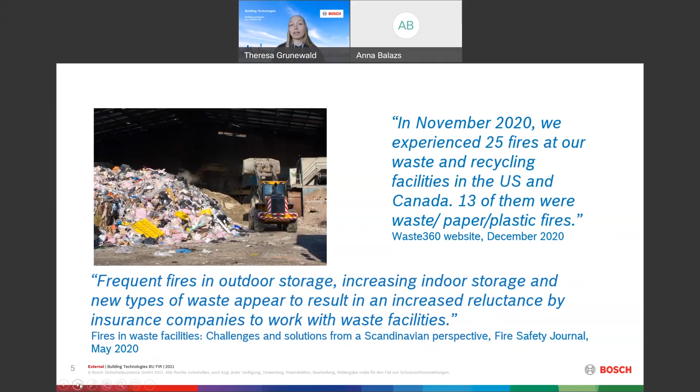And coming from this part of the customer side, so from the safety manager, from the guys around, from our interviews we took, now to the site itself. Where do we see these potential fire sources, and how could fire start and spread in these areas? We decided on the three main areas where we think, and based on the facts we had, know that fires can start. And the first one is the type of waste.

If you think about waste which is stored in these facilities, there's flammable chemicals. There might be batteries or also electrical components wasted in those areas. Also, at the moment, these hand gels regarding the COVID crisis, but all of that has a high fire load inside. So when they are combined together in a waste, or just stored together as a waste hill, this can easily be a self-ignition heat, for example, or they start to burn because they are combined together, and all of that can cause a fire.

Going on to the second part, it's the service area. Service area means workers at the conveyor belts, for example, hot work or heat works, equipment which is transported by the conveyor belts. If conveyor belts are starting to get hot because of the wheels and so on, or the hot work at the conveyor belts afterwards still having some heat, then in combination with the waste which is transported, that can cause a fire as well.

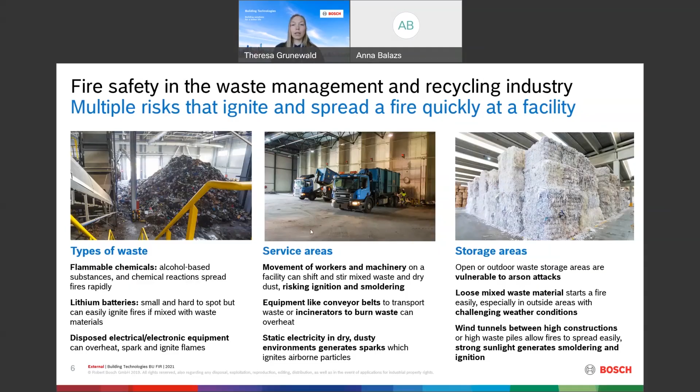So let's go on and see why AVIOTEC now. So we are talking about a video-based fire detection solution today. And why is that a solution for these areas? And there are also other fire detectors. What is their hurdle in these areas? What is the challenge for them?

And the challenge, what we see is the high fire load. So because of that high fire load, a fire is spreading really fast. And here you need a really, really early detection, because the earlier you can detect and extinguish it, the less it can spread around.

And in difficult environments, for example, also in the environment of waste and recycling where we see high ceilings, a standard fire detection system is just taking too long, or the dust and the humidity is kind of disturbing the detectors which we normally know.

So thinking about an aspiration smoke system, it is sucking in the dust all the time, and then the pipe is going to be filled with the dust from this whole production cycle. And you need to blow it out all the time. Every second week, for example, it needs to be cleaned up. So this is a lot of maintenance effort, and they can also cause false alarms with that dust and so on. So here is the challenge for these kinds of detection systems, where AVIOTEC would now be a really good solution to fix it.

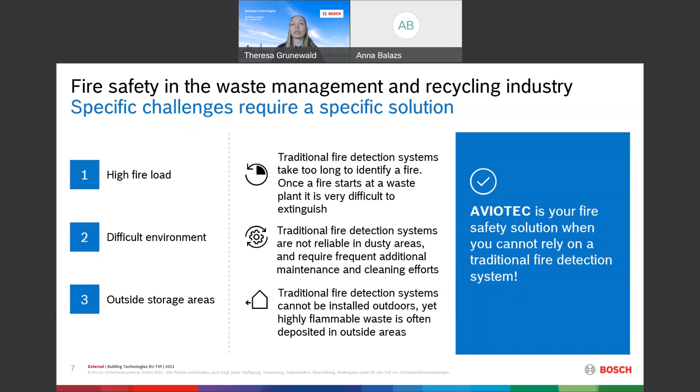I want to go a little bit deeper into the use cases I was talking about. So let's see where we really face these challenges or hurdles, where fires can start, and how that can be solved by AVIOTEC. So fire detection really needs a fast detection so that we can also react fast. I said that high fire load, when you've got mixed waste, really needs a high speed of detection, because if not, it is spreading fast.

And if you now look at the picture on the right-hand side, you see that big hill of paper, you see the machinery, so you see a lot of different things can start a fire. And if that waste paper hill now starts to burn, it's spreading to the top, but also to the side where the other paper is stored. It can then go over to the machinery, and then you've got a big fire.

If it's starting at the bottom, and you can directly trigger on that fire and detect it, and somebody can go with the fire extinguisher and stop it, then that's the easiest way, and you do not have a lot of problems because of that fire. So fast detection for fast reaction.

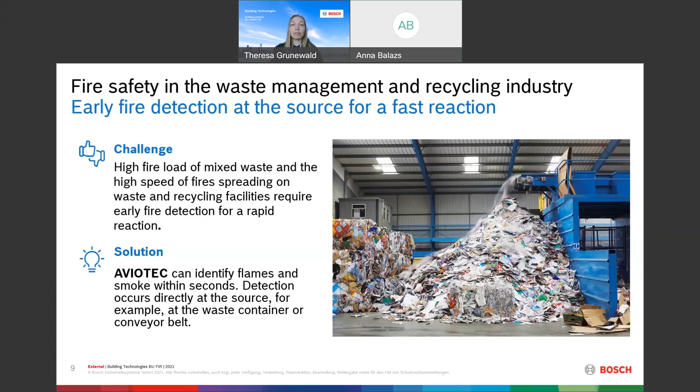The difficult environments I was also talking about. Now you see the conveyor belts moving, all that waste you see in the back where the light is coming through. It's really dusty, it seems like a foggy area, but that's the dust. And in those cases, if you just install the camera in a housing, that's not a problem for it, because it can watch and it can detect smoke and flame, and the maintenance effort is really less in that case.

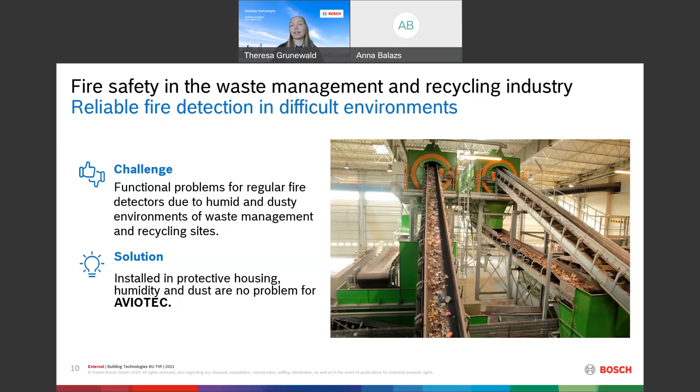Then if you've also got humidity and dust, it's not, as I said, a problem for the camera. It can detect even though there is dust or humidity in that area. So also here, the housing avoids a real maintenance problem in that case.

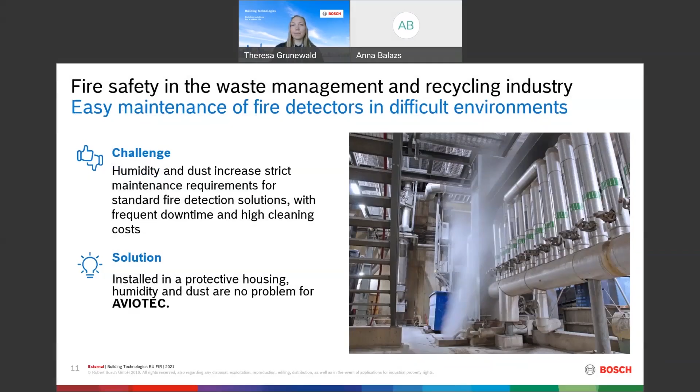And the fourth use case, and that's one of my favorite ones, I have to say, because it's about outdoor detection. And I really like the photo we can see on the right-hand side, because for me, it's really that kind of use case in waste and recycling management. You've got an area with a roof on top, but you've also got an area where you just have the waste outside with no roof, but there's work going on, so the heat, the sunlight, the wind can all influence a fire starting.

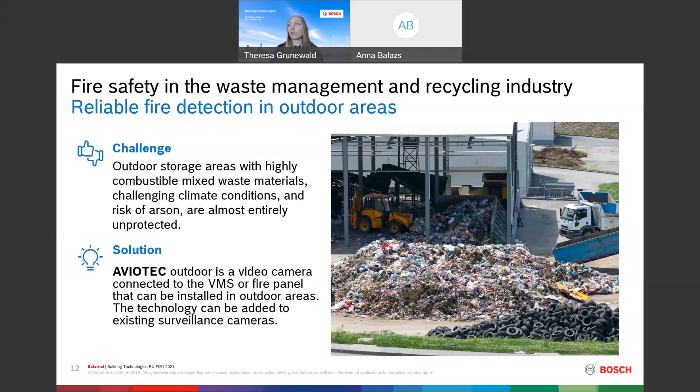And under this condition, especially for that outdoor area without a roof, where would you place a detector? It's just not possible to place one. And here you can add a camera at one of the poles or something. You can monitor that area, even though there's no roof on top of that waste.

So why should we use AVIOTEC as a camera? And now you also see the product. So the first time it's that kind of camera, and it's an early fire and smoke detection. So you can detect flames or smoke. It's working really great in harsh environments, so talking about dust and humidity. And it's a really, really fast outdoor fire and smoke detection.

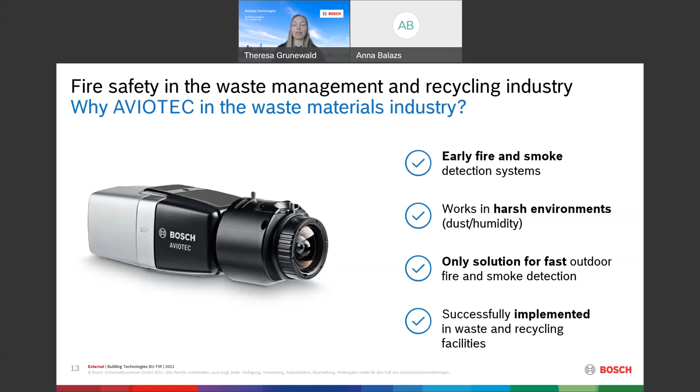In that case, I'm saying only solution because it's compared to other fire detectors like point type detectors or aspiration smoke systems, which are just not able to be installed in that areas. It's not that they could not, but it's just not possible here. And it is already successfully implemented in some recycling industries, for example, in Italy, but also in Germany. And I will come to these references also at the end of my presentation.

As time is also running and I could talk and talk and talk, let's see now, coming from the customer side and the pain points and so on, now to the way how it works. I think maybe some of you already know how it works and others had never heard about it, and the other ones would say, I already installed it, which would be really great. But how does AVIOTEC really work?

So I brought 4 videos with me, and 2 of them you already see now, and I hope that it starts. Yes, so it works. On the left-hand side, we can see a flame, and on the right-hand side, we can see a smoke. And that's in color mode of the camera. And what you will see also is that as soon as you see the small rectangle around the flame on the left-hand side, this is already an alarm. So here we can see that the camera already triggered a flame alarm in that case.

So on the right-hand side, you see a smoke moving. The smoke is hardly visible in the picture because it's not that visible like the flame, but also here we can already see that detection. So you can see this small, I know it's small, but you might see it, small rectangle around the smoke, and this is the detection of the camera. As soon as one of that is in the field of view of the camera, it will be detected. An alarm is going to be triggered at a system which is installed.

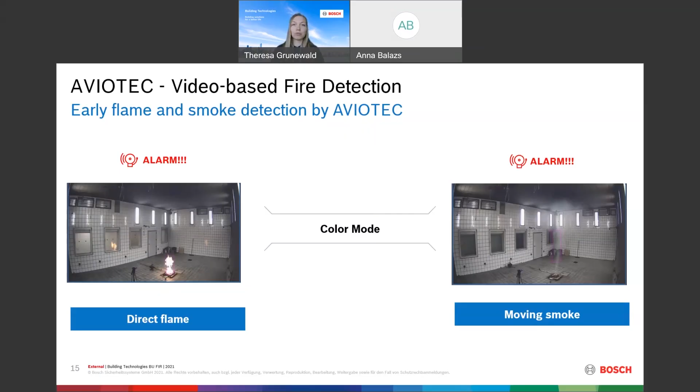What I want to show you next is that it's not only working in color mode, but also in black and white mode. And the black and white mode is especially important if you've got an area, for example, the outdoor area, where you do not have light available in the night. So for example, the camera can work down to 2 lux. So as soon as we have 2 lux illumination in that area, that's fine. It's already really dark, I have to say.

But if we are going below that, or we go to 0 lux, so no light available, maybe the moon is covered with clouds, so it's really, really dark outside, the camera can still trigger a smoke or a flame if you installed some infrared illuminators. So non-visible light for us, but visible light for the camera in that case. And then it can also work like you see here in the black and white mode. And also here it is triggering. Here you can see now the red rectangle, and on the left-hand side it's a small yellow one. And this is the detection of the camera.

What you can also see, and this I like at that video on the right-hand side, is that there's a different outline. And that outline and the green line below that is the general movement detection of the Bosch cameras we have. And AVIOTEC, the video-based fire detection, is combining the fire detection and this kind of video movement detection. So there's different intelligent video analytics available on the cameras from Bosch. And in AVIOTEC, these two can run in parallel.

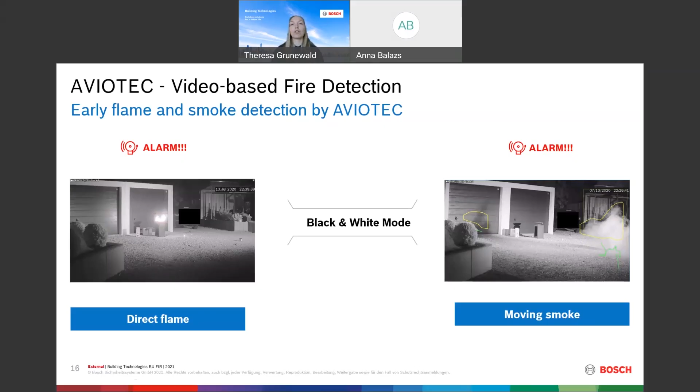So you can have the fire detection, and on the same side, it's also a video surveillance camera, which might be also useful in the outdoor environment if somebody is going on the premise who is not allowed and you can detect them. So all of that is a good combination possibility.

And then it's an easy thing. So you've got the camera, which you saw in the picture on the one slide, and this camera is monitoring the scenery. And why is it really an earlier fire detection than the other detectors? It doesn't need the smoke to reach the camera because it just needs to be in the field of view.

And if you think about it, you also might look up to the ceiling and see a point type detector. Smoke every time needs to reach that detector at the ceiling so that it is able to trigger. How should it trigger if the smoke is not going to the detector? And for the camera, it's not needed that the smoke or the heat of the flame is going directly to the camera, because it just needs to be in the field of view, like here on the left-hand side or at the videos we saw before.

So then intelligent algorithms inside of the camera are analyzing if that is really a flame or smoke or not. And then if it is a flame and the verification time is done and it's still a flame, it's still smoke, then this alarm is going to be transmitted to, for example, a video management system or also to a fire alarm panel as an internal alarm. And that's the whole magic, I would say, but that's just something what we see on our side.

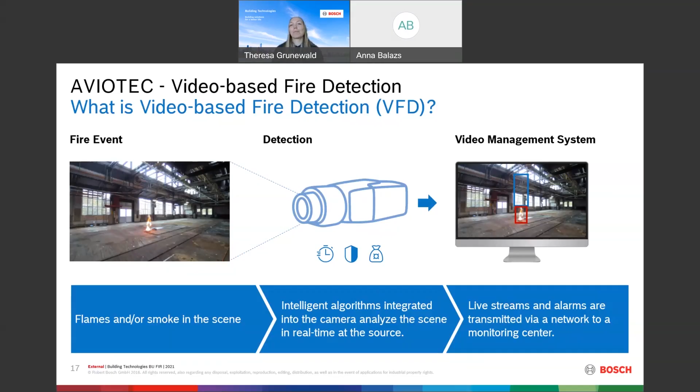But what is going on inside of the camera? So how is that algorithm working? And for that, I brought two slides with me because we've got a physical algorithm, and now since some months, we also have an artificial intelligence algorithm in attachment to the physical algorithm. But let's go back to the basics.

So the physical algorithm of the camera is really focusing on the physical flame and smoke model. And I just brought some major parts of it with me because I don't want to go too deep into the algorithm. I have to be honest, I also don't understand it fully. This is part of the engineer and the guy who's working day by day only on the algorithm. But I like to really have a small part of understanding of it.

And the flame model is based on the fact that the flame every time has a flame core, and based on that core, it also has a whole flame shape, and it has a flickering. So the flickering is, for example, every time above the flame. It's not below the flame. It can be beneath, it can be above, but that is then giving the whole flame shape. And based on the background color or illumination, the camera also knows how the flame should look. More yellow, more white, more red. And this is all influencing the algorithm and the analytics of the camera.

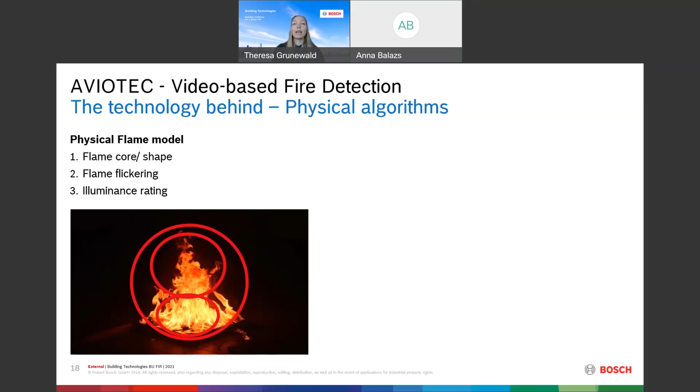Coming to the smoke, you might know how smoke looks, but there's also a physical model behind it. It's based on the fact that the smoke starts from a hot source, so the fire, and then the hot air, so the smoke, is moving. And it moves like half transparent to transparent objects going up. And in our case, we saw it's not every time only up, it's also going sideways because of air influences. And that is then analyzed by the camera.

And what is really important is that it can distinguish between the uprising smoke and an uprising or sideways moving object. A truck, for example, with a gray back. If that is moving slowly to the side, for sure we don't want that one to trigger the flame or the smoke alarm. And all of this is influencing the algorithm and the development. To have a great algorithm behind it, we developed that further.

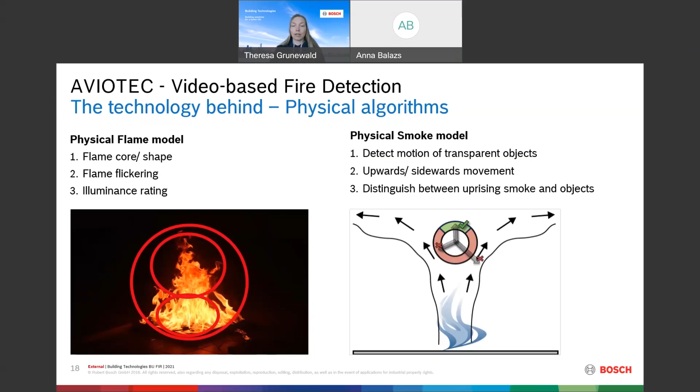So we started in 2016 with a camera, and since then, close to every half a year, we developed a new firmware algorithm, and with each new firmware version, the algorithm was working better. What I mean with better is that some things where we had a false alarm in the past, because we just did not know that the camera would trigger in these cases, were adjusted, and now we have a more robust algorithm, so that you can be sure that if you use the more robust setting of the camera, these false alarms are not going to be triggered. And that is a continuous improvement of the camera. And that continuous improvement has now also taken the next step to add a physical supported AI.

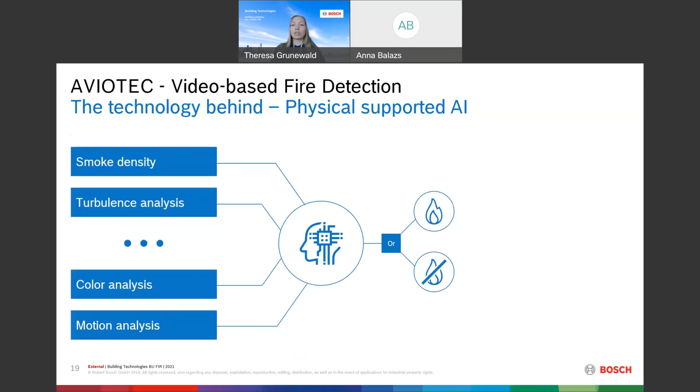This information is then analyzed by that pre-trained artificial intelligence, based on videos and installations done in the past and also received from customers saying you can use that for development reasons. And then this artificial intelligence decides if it is really a flame or not, or smoke or not.

And this led us to the fact that we can now have this 2 lux illumination level, or even 0 lux with the infrared illumination. And we also have a higher detection range and more false alarm robustness.

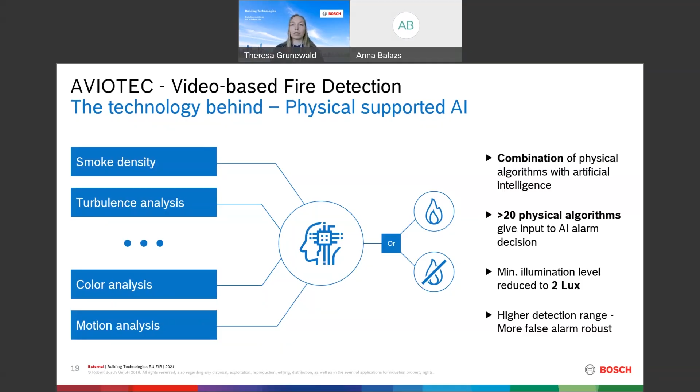Last part of it, and then I'm also available for questions, are the references. As I said, we've got one nice installation in Italy. To be honest, I'm not able to name the customer because it's not an official reference, but I can say that it's in Italy, and we've got a lot of different installations already. So it's not only one place, it's different sites of that customer, and they are really happy with the installation and also with the solution.